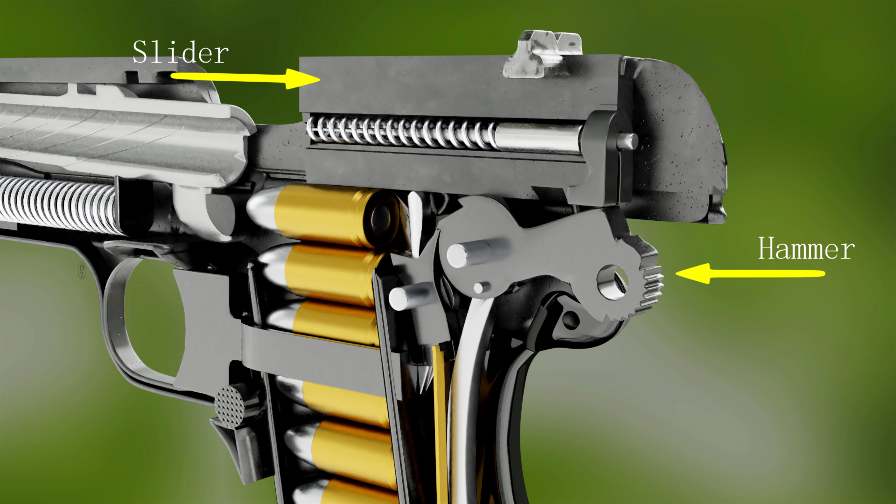This causes many things simultaneously. Let's see them one by one. First, the movement of the slider pushes the hammer back. The hammer is connected to the main spring through the hammer strut, and thus compresses the main spring.

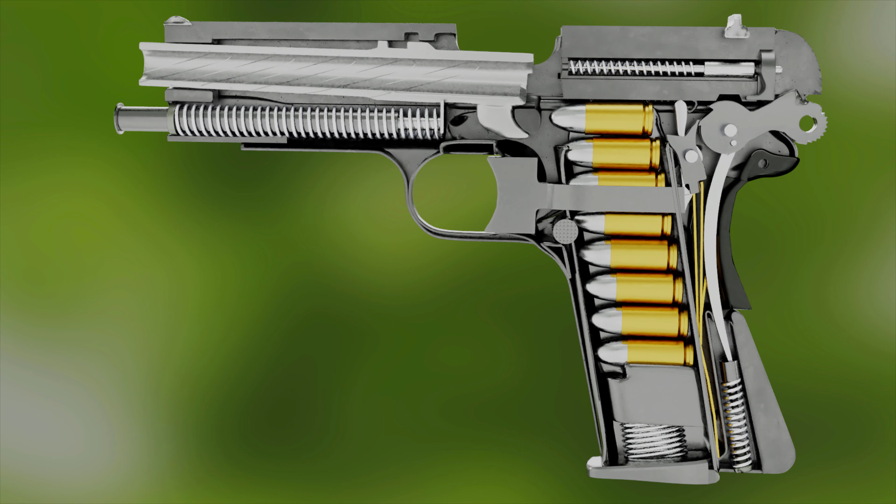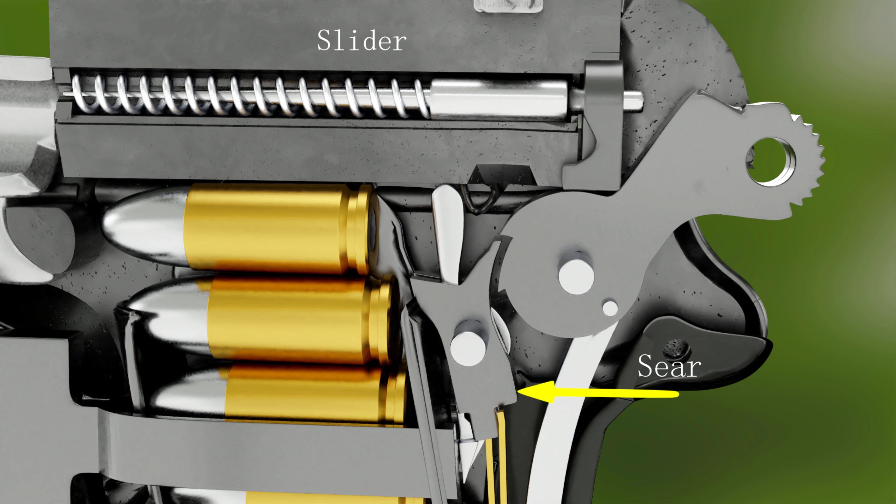This is the sear. It controls the movement of the hammer. When the slider moves back, the sear, under the pressure of the leaf spring, engages with the hammer and prevents it from returning back to its initial position.

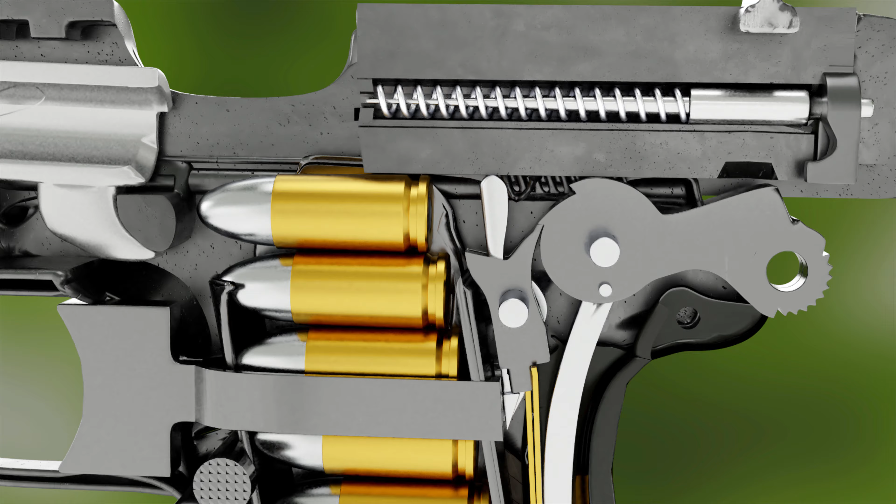When the slider is released, the recoil spring causes the slider to return to its initial position, while the hammer remains at its position due to the sear. This is called cocking of the pistol.

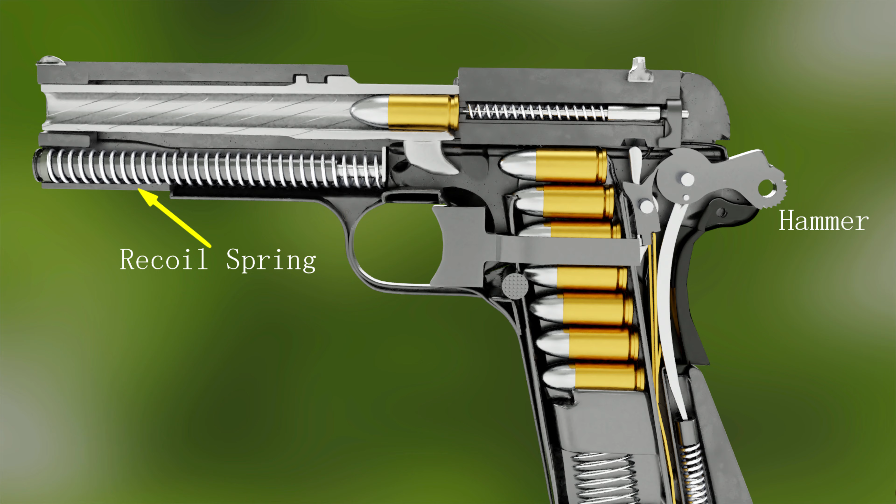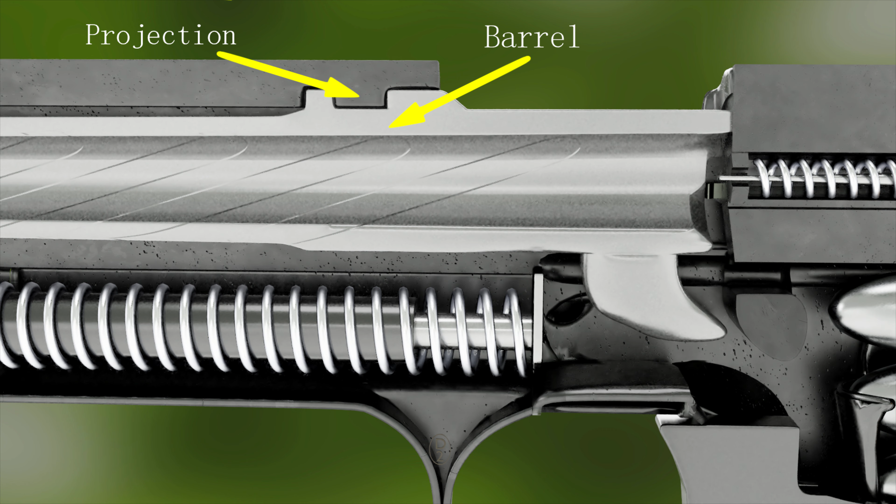Now let's see how the cartridge is loaded into the barrel. When the slider moves back, it pushes the barrel back through the projection on the slider. This lowers the barrel so that the cartridge can be fed into it easily.

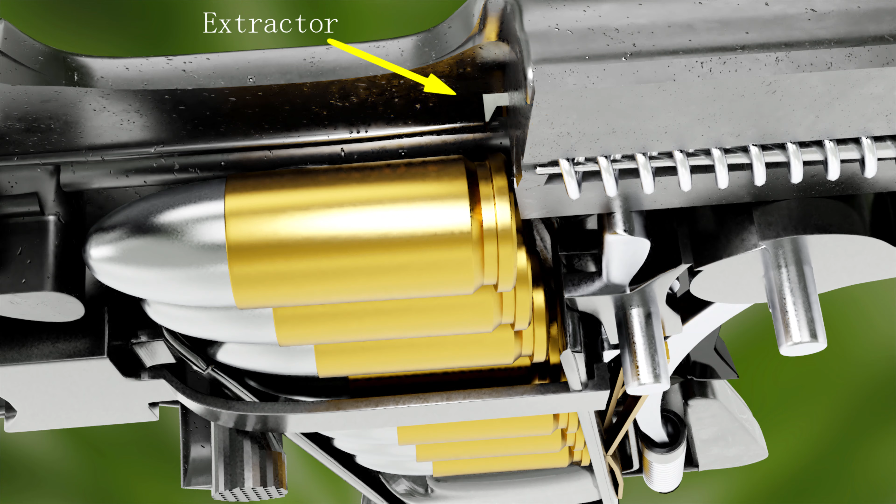When the slider is returning back, it takes one cartridge into the barrel and pushes the barrel forward to its initial position. The back of the cartridge fits into the extractor's notch, which is attached to the slider.

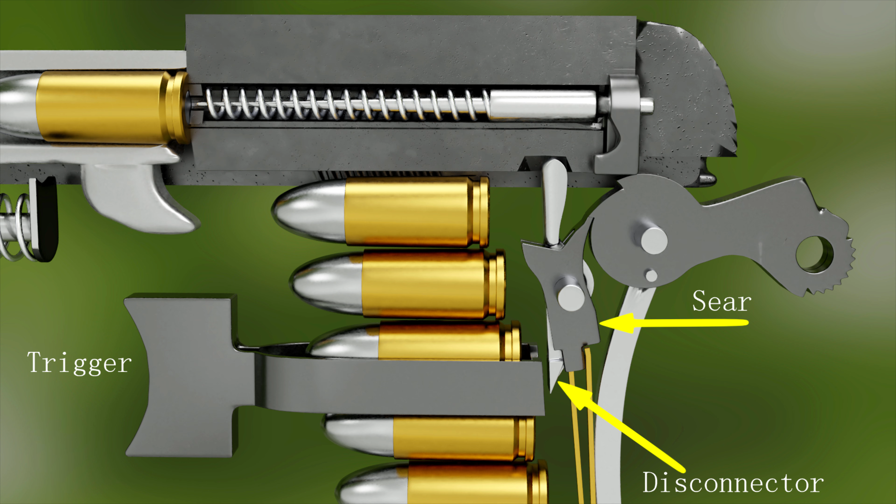The pistol is now ready to fire. When the trigger is pulled, the sear is pushed through the disconnector. This causes the sear to disengage from the hammer.

The hammer is now free, and under the pressure of the main spring, strikes the firing pin, which is contained inside the slider. This firing pin, in turn, hits the primer of the cartridge at its back.

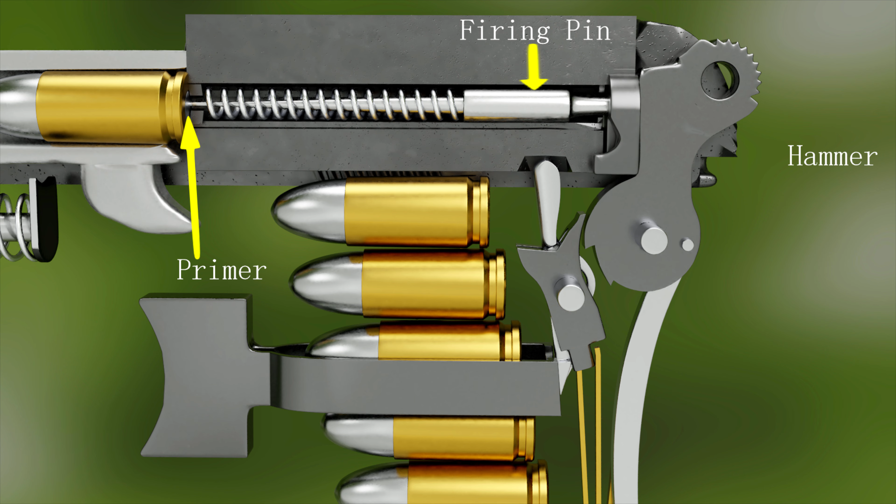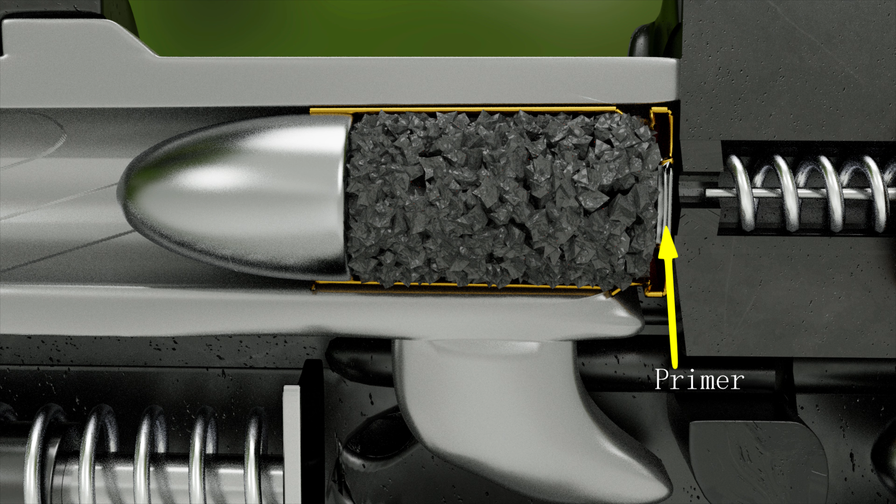The primer contains impact-sensitive explosive, which gets ignited by the impact of the firing pin. This burns the powder inside the cartridge, producing lots of gases, and thus the volume behind the bullet is filled with extremely high-pressure gases.

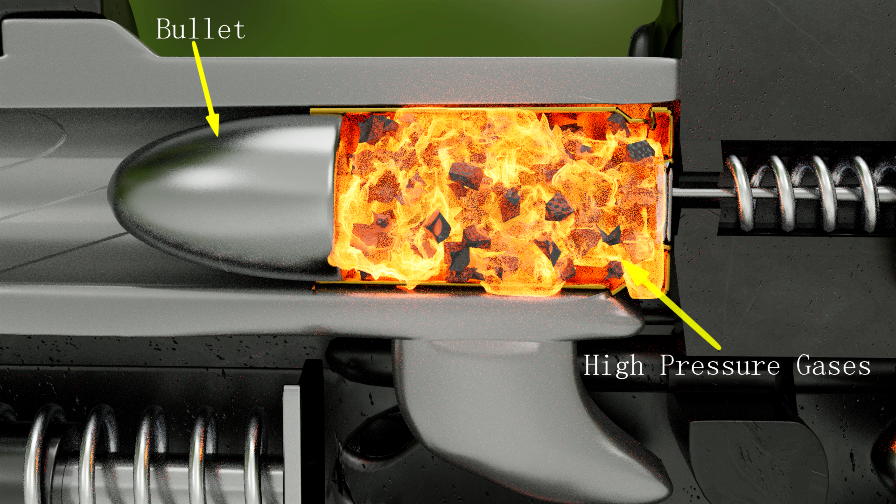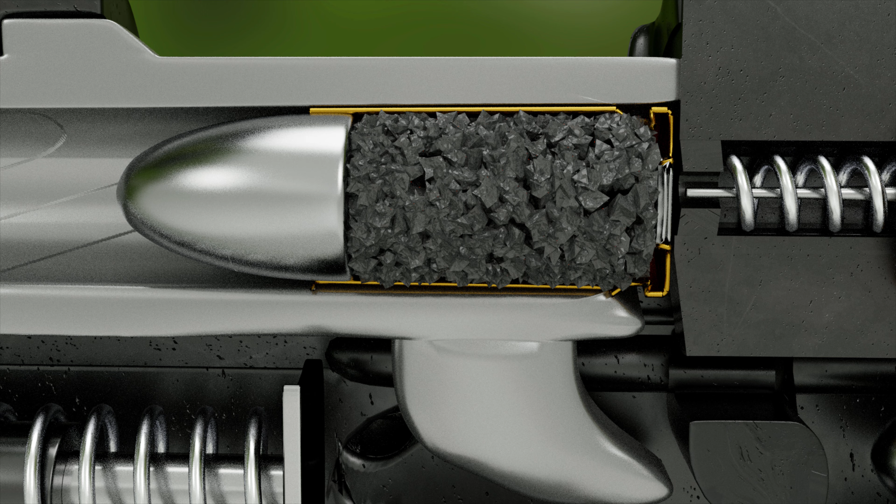Thus, the bullet is forced into the barrel, causing it to come out at very high speed. Once the bullet comes out of the barrel, gases are released into the atmosphere, and no more force is exerted on the bullet, which continues to move due to its momentum.

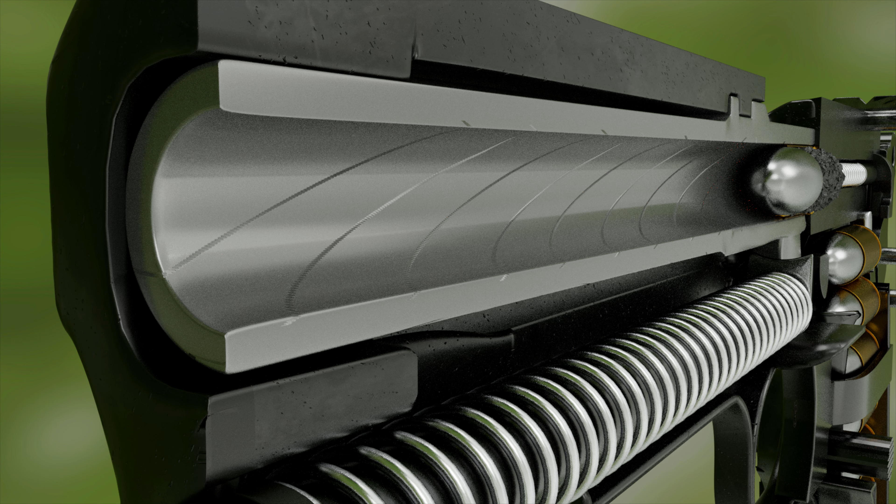The lands and grooves are cut into the barrel, which causes the bullet to spin for stability.

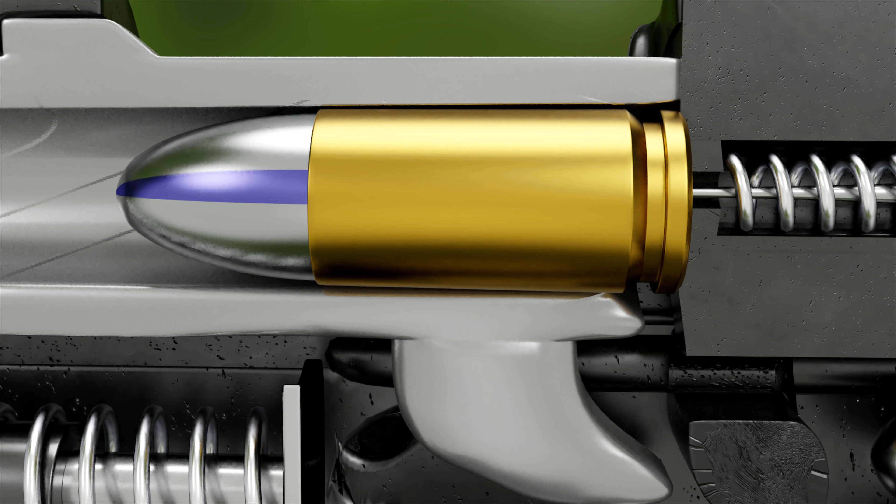These gases also apply equal and opposite forces on the gun, but due to the heavy weight of the gun, it does not attain higher speed in the opposite direction. Some of the energy of this explosion is utilized in pushing the slider back.

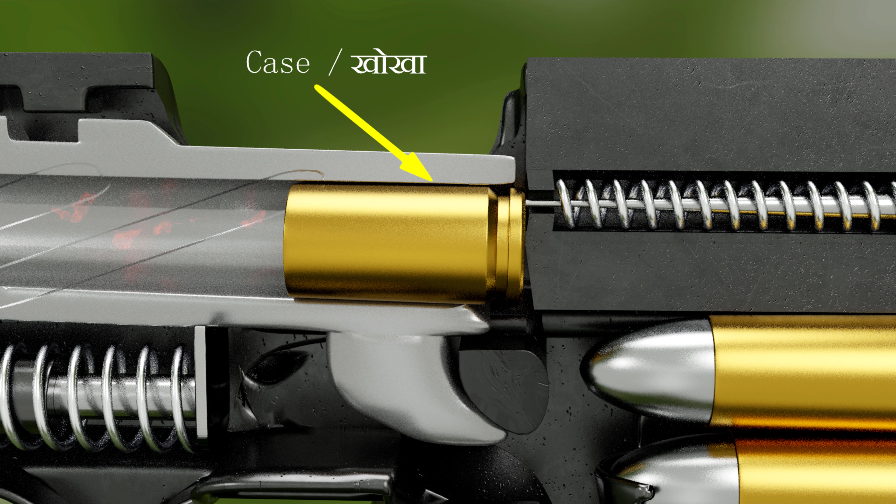The case moves with the slider and is ejected out with the help of the ejector. The slider also cocks the hammer by pushing the hammer back and reloads the gun automatically.

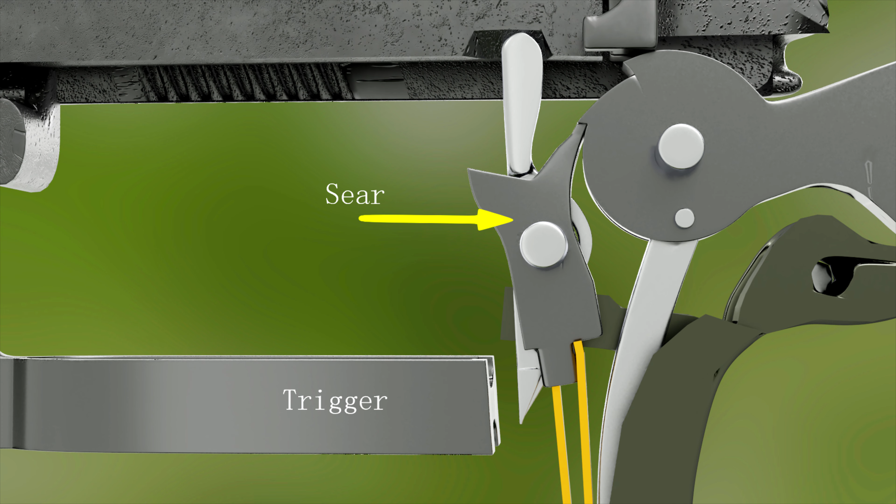And the gun is again ready to fire the next round. The trigger does not push the sear directly. The sear is pushed with the help of the disconnector.

When the slider moves back, with the help of a slot cut into the slider, it forces the disconnector to slide down. This disconnects the trigger and allows the sear to engage with the hammer even when the trigger is pressed.

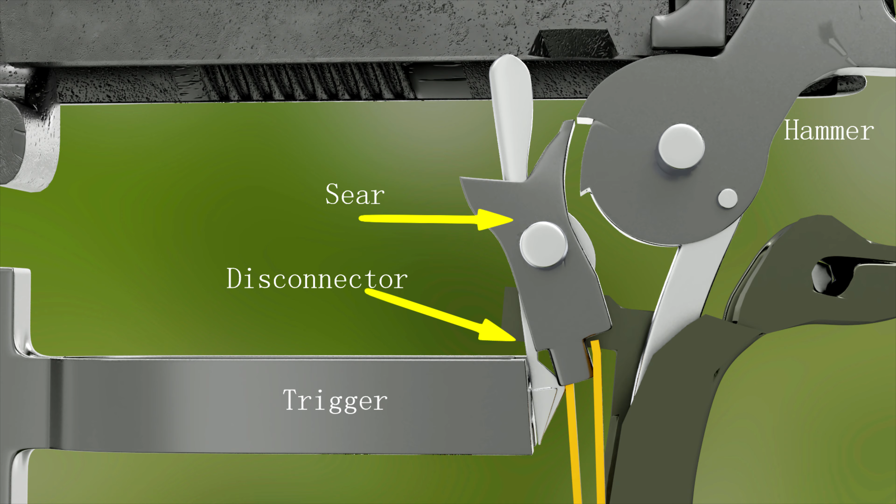When the trigger is released, the disconnector moves into the gap in the slider under the pressure of the leaf spring, and thus the gun can be fired again.

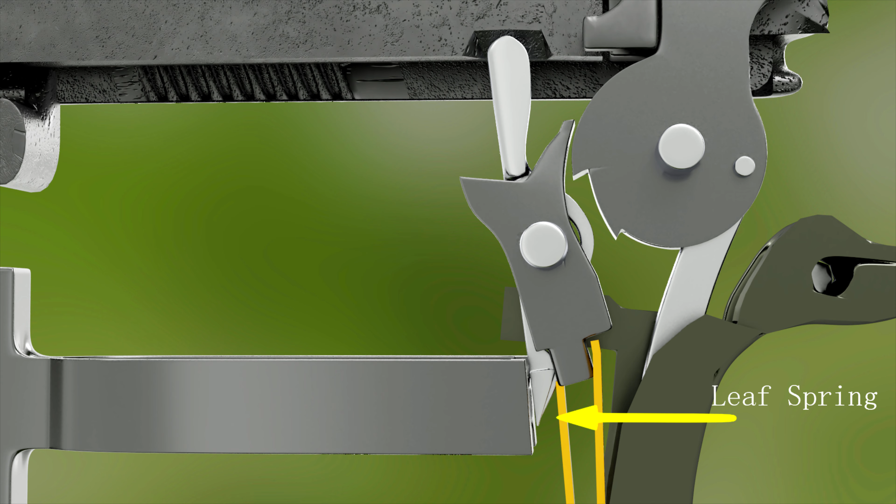The grip safety prevents the gun from firing. Only when the gun grip is grasped by the hand can the trigger move the disconnector and thus the sear.